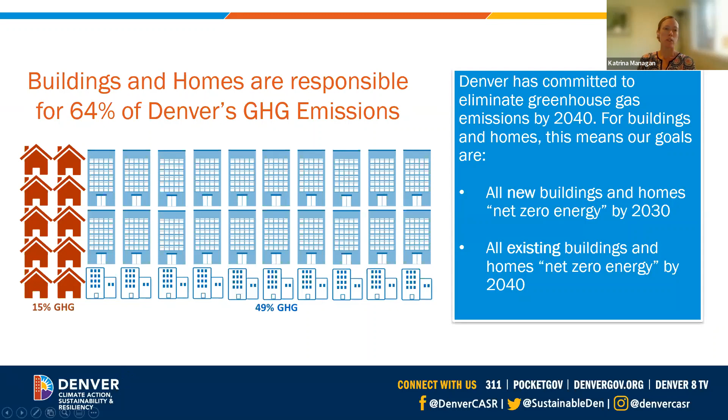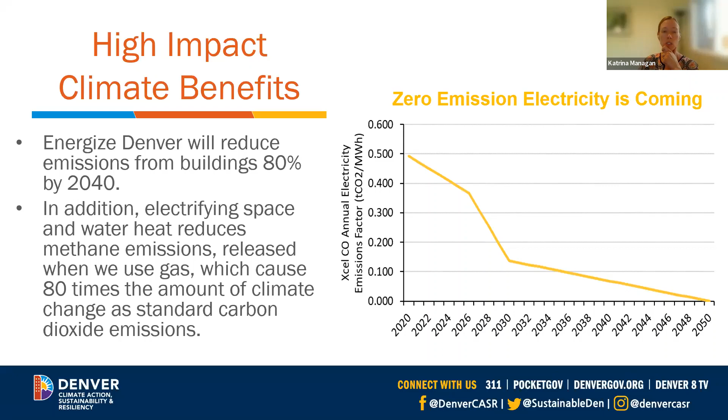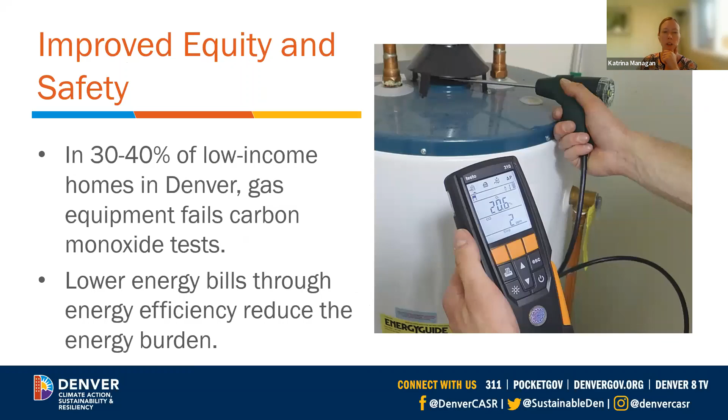And if we go to the next slide, the other really big benefit is improving equity and safety, especially from these electrification requirements, because we know that in 30 to 40% of low-income homes in Denver, gas equipment fails carbon monoxide tests. This whole ordinance is also designed to lower energy bills through energy efficiency and reduce energy burden for the most vulnerable in our community. So with that, I will pass it on.

I think I pass it to Chuck. Is that right, Jeff, to review the code changes? Actually, I'll give this short overview. Forgot my last slide. So the electrification requirements, this is what we're going to dive into deeper today, are to require the partial electrification of space and water heat upon system replacement when cost effective.

So the first thing that changes in 2023 is just permit process changes to bring near parity in permitting between gas systems and electric systems or heat pumps. That's what we're really going to focus on today, is that first box under 2023.

The next phase, just so you know what's coming, is that in 2025, heat pumps will be required upon replacement of easy to electrify equipment. This is furnaces, rooftop units, individual water heaters, when cost effective. And then in 2027, heat pumps will be required upon replacement of hard to electrify equipment like PTACs, boilers, central hot water systems, when cost effective.

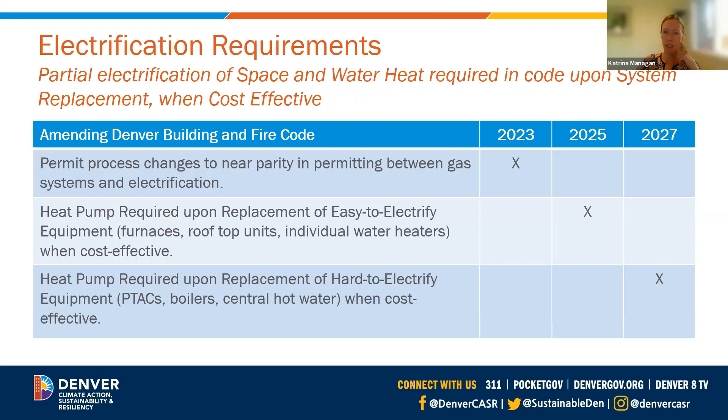All right, so go ahead and I'll pass it to Chuck. Yes, good morning everybody, I'm Chuck Bartel. I'm with Community Planning Development. I'm the supervisor of the Mechanical Plumbing Plan Review team, and we specifically review the commercial multifamily projects, which is what the Energize Denver ordinance applies to. So the electrification requirements will not be applied to single family homes, duplexes, or IRC townhomes.

Next slide. The code language that's going to be presented here is proposed draft code language that is already supporting the ordinance. So this isn't new language. It didn't go through the standard code adoption process of the tech code committees. It was mandated by ordinance, so it's being brought into the building code, so our community has an easier time finding it, and when they're designing, it's located in one location.

So the first item here is when indoor gas-fired warm air furnaces are replaced, they're going to be required to be replaced with no-NOx or low-NOx equipment, or they need to be high efficiency, over 90% AFUE. The one exception is for indoor gas-fired makeup air units. Next slide.

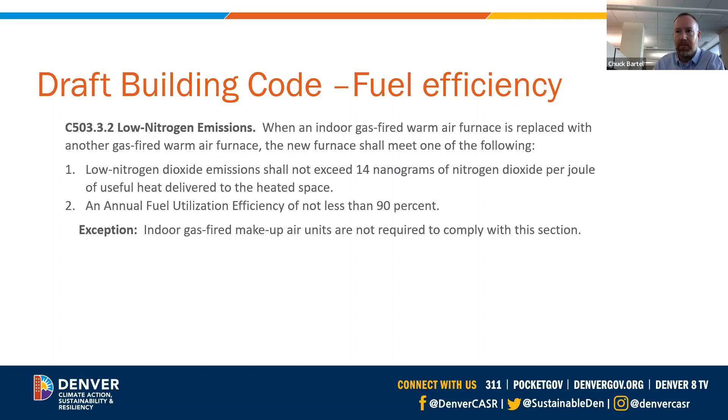Partial electrification for space heating. This is, so in 2023, when you're replacing a gas-fired warm air furnace, if you're going to replace it with gas, you'll need to submit 2 of the 3 options here: either an electrification feasibility report, provide sizing calculations, or gas pressure test the entire gas system serving that building or on that meter. The exceptions are, if this is obviously an emergency replacement, you're not going to be required to submit to us. You'll be able to use the quick permit process as used today.

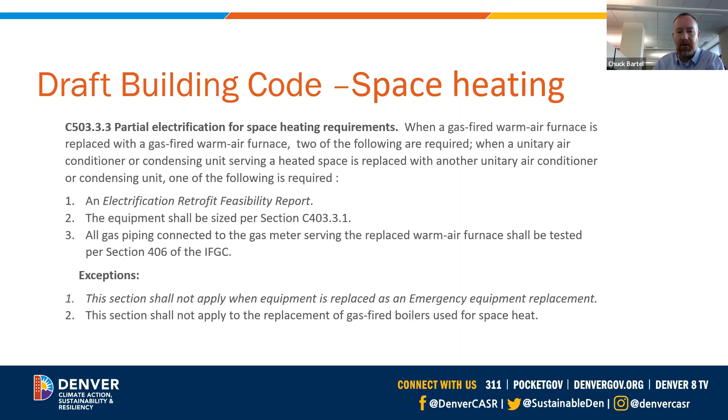And then this will not apply in 2023. The replacement of gas-fired boilers like for like will still be allowed to be a quick permit or not have to go through plan review.

And then water heating. So when replacing a gas-fired storage water heater, you'll no longer be able to pull a quick permit for it. You'll need to submit for review, and part of that review will be the electrification retrofit feasibility report, which will be reviewed by CASR.

Or you can gas pressure test the gas system. And again, this doesn't apply to emergency replacements, defined as replacing one piece of equipment. So it can't be an emergency if we're replacing all the water heaters in an entire apartment building. If you're replacing within one unit, it could be considered an emergency replacement.

I did see in the question, Chad, what is defined as partial electrification? It's defined as the main source of heat, and then supplemental could be something other than electric, so it could be a gas backup. Whatever the supplemental heat is, it's not required to be electric. The idea is to limit the amount of gas moving forward and have the primary be electric, and ideally heat pump.

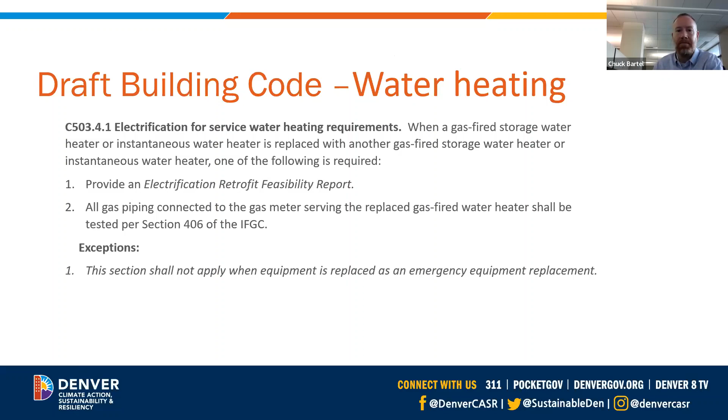So the main intent of the changes coming in 2023 is to create parity between permitting for changing from a natural gas-fired furnace to a heat pump versus just replacing natural gas, because the processes aren't equal right now.

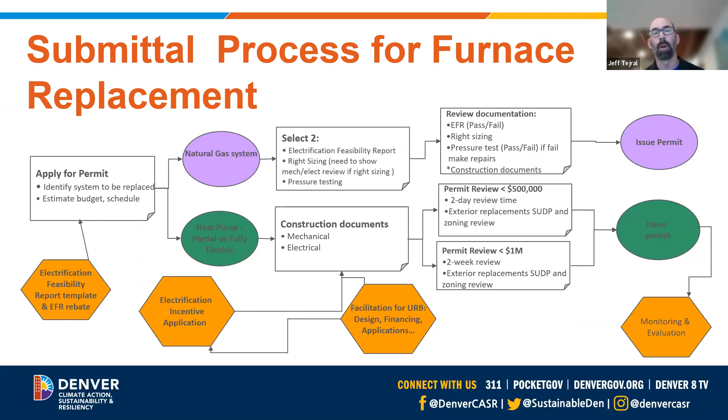And lastly, we'll be doing more monitoring and evaluation. I think that's a key aspect of our program - looking at how this all works, how we can serve the community better, what gaps we don't have right now, and whether there are buildings in more need than others. So with that, we're really going to be setting up city support.

And as Chuck said, bringing on additional staff is one aspect of it. But we know that this is not something we can just turn loose these requirements and everyone will just jump through them. It's not all easy, and it hasn't been done before. So to that note, we know we have to stand up programs.

The first one is really these electrification feasibility reports. And as I said earlier, template designs, we're coming out with those very soon. We'll be running through those with our pilots as we do those. And we'll be setting up training and educational material this fall and early winter to prepare for that March 1st timeline to implement this code.

We have contractors on board already to review the submissions, and our goal is to do about 1,200 of these a year. That's a pretty ambitious goal at this point, considering we haven't done these before, but I think it's achievable with the team that we have.

And our first step into this is really piloting. We need to actually work with building owners and their contractors to go out and install these products into buildings, show local demonstrations of these and how they work. And we need to start off with running them through - is it feasible? We need to know what are the costs, what are the barriers to electrification, and then we need to implement these projects throughout this phase.

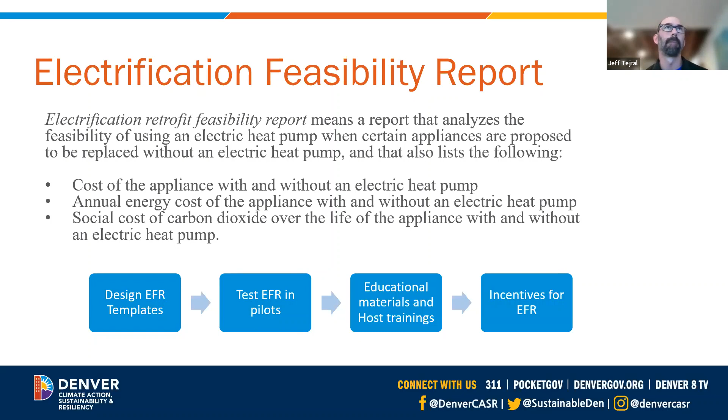Pilots and incentives - as we begin these, I think what we're really focusing in on is these systems that are at their end of life. We know there's a lot of people that have just installed or have fully functioning systems today. We're really looking at those easy to electrify systems first, that have 1 to 3 years of life left in them. We want to focus on those because we know those are the next ones to come through. We want to make sure that half of our funds are going to the under-resourced buildings.

So we would expect that the cost of replacing systems, the actual gas system itself, would be the first amount that the building owners would bring in, and that we would also be looking at the financing options, other utility rebates from Xcel Energy, and our incentives as part of this.

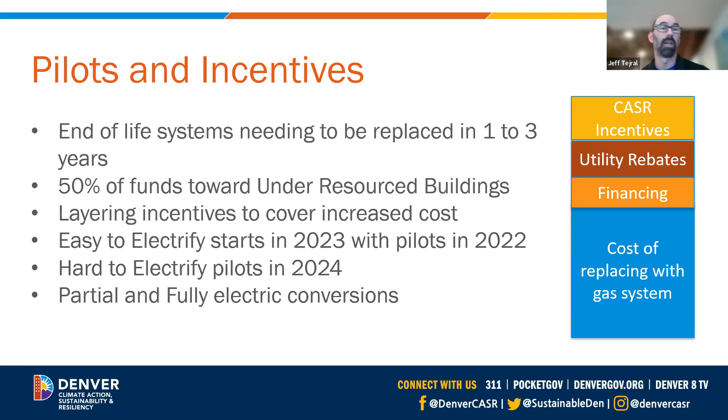As I said earlier, easy to electrify starts in 2023 with pilots starting here in 2022, this fall and winter, and the hard to electrify pilots starting in 2024. We're looking at partial and full electric conversion, so this is a little bit of all of the above.